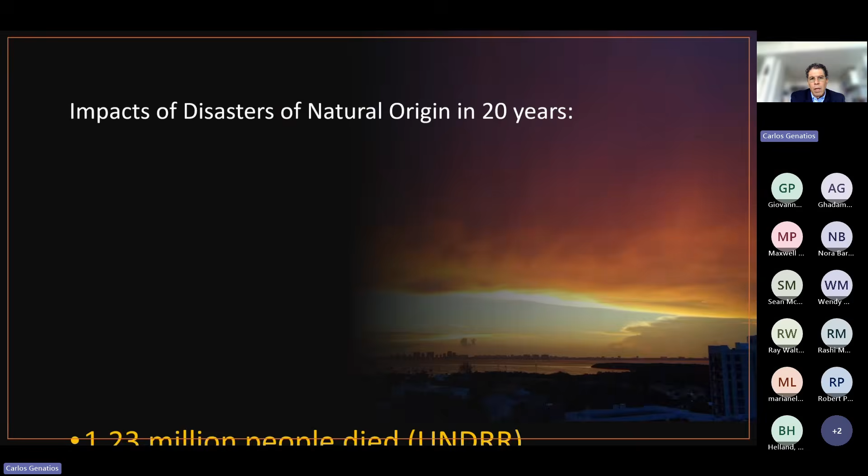My name is Carlos Genatios. I'm a professor at the Universidad Central de Venezuela and also at Miami-Dade College, Director of Engineering and Technology.

The impacts of disasters of natural origin in 20 years have shown that 1.2 million people have died, and most of those events are produced by earthquakes. Here is a slide produced by the Université Catholique de Louvain, Brussels that says that in 122 years, 8.5 billion people have been affected by disasters.

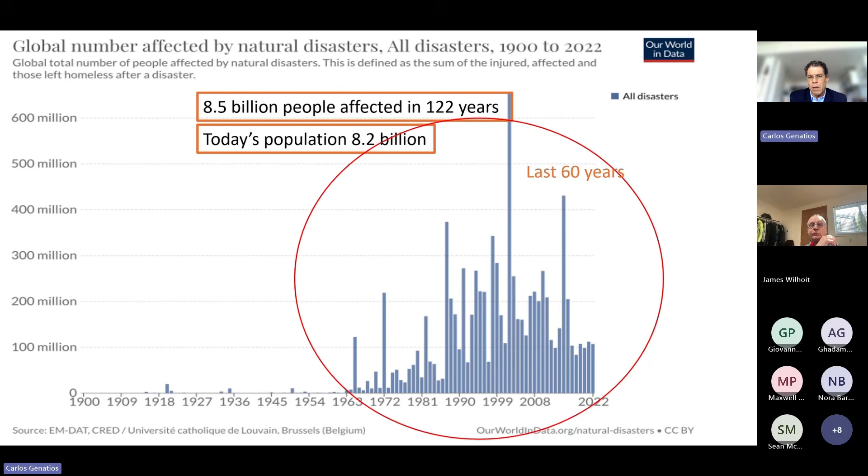And the population is 8.2 billion. But the worst part is that most of those people have been affected in the last 60 years, and this is the kind of thing that happens, you know. Those are the kind of photos that you see often.

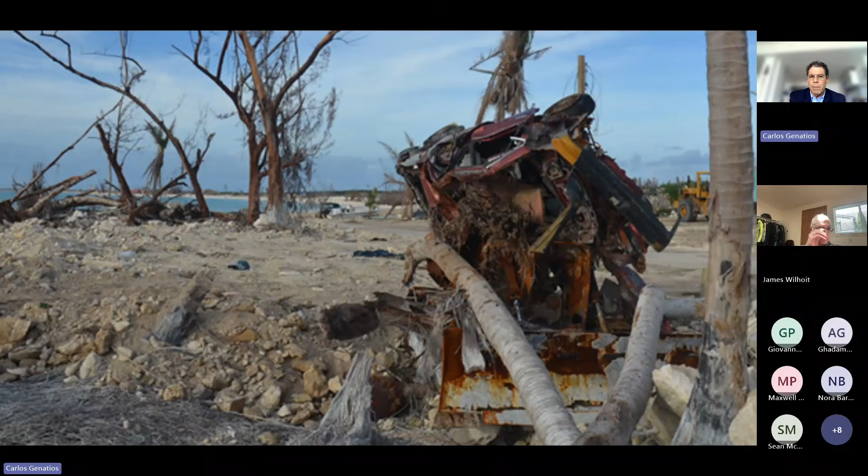This is New Orleans. And when I see this, I am always impressed by the fact that how can a hurricane turn steel into butter?

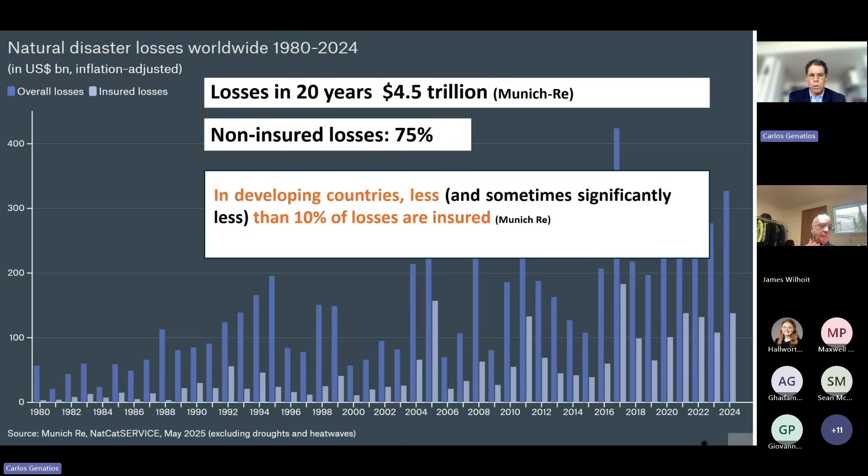The losses in 20 years were $4.5 trillion, and the non-insured losses were 75%. These are very impacting figures, but when you go to the developing countries, it's even worse, because less than 10% of the losses are insured. This is a very difficult situation.

Who are we leaving behind? What's the reality? Who are the people who are not insured? How do they survive? These are the uninsured - the people who really suffer the most, and the ones who lose everything when they don't lose their lives. I will be sharing with you 3 case studies.

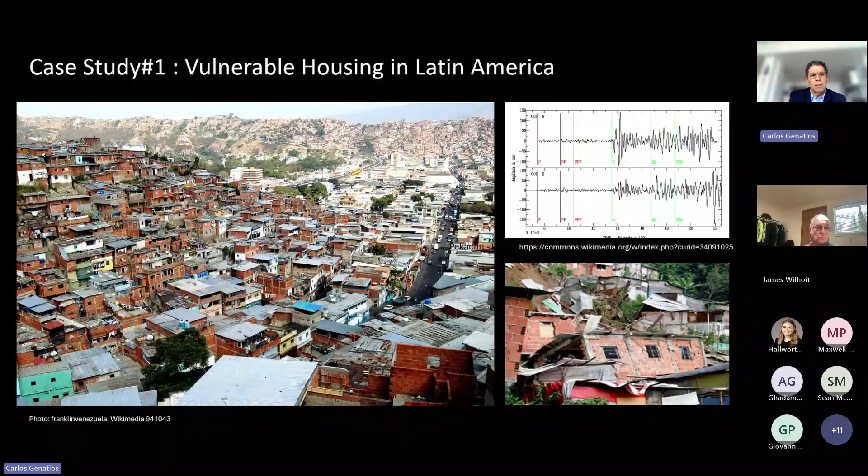The first one is going to be vulnerable housing in Latin America. The second is an analysis of a case of extreme rainfall and the disaster that was produced by this extreme rainfall event. And the third case study is the analysis of hurricane and flooding risks in South Florida, with certain models we have been developing and some strategies to better understand what happens there.

I will be following a methodology - an approach in 3 phases. First, to try to really understand and well define the problem, as well as we can. Then use engineering tools, research and design to find solutions. And then, how to turn those solutions into policies, into action that could deliver for the people, really.

I also want to say that the things I'm going to present, I've been doing with large teams of colleagues and friends, most of them for years.

First case study: vulnerable housing in Latin America. Phase 1 is what the problem is - we have to understand the problem.

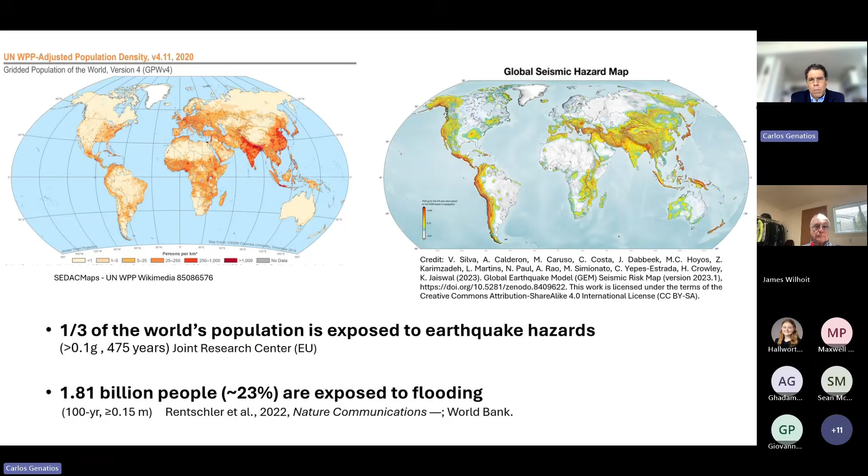First of all, 1/3 of the world's population is exposed to strong earthquake hazard, and 1/4 exposed to flooding. On the other hand, according to the United Nations, 1/3 of the population live in inadequate housing - they lack adequate housing.

But this 1/3 figure is not true - it's worse than that. Just to give you an example, look at this. This is the way some people construct their housing in Asia - India, Bangladesh - this kind of thing occurs often.

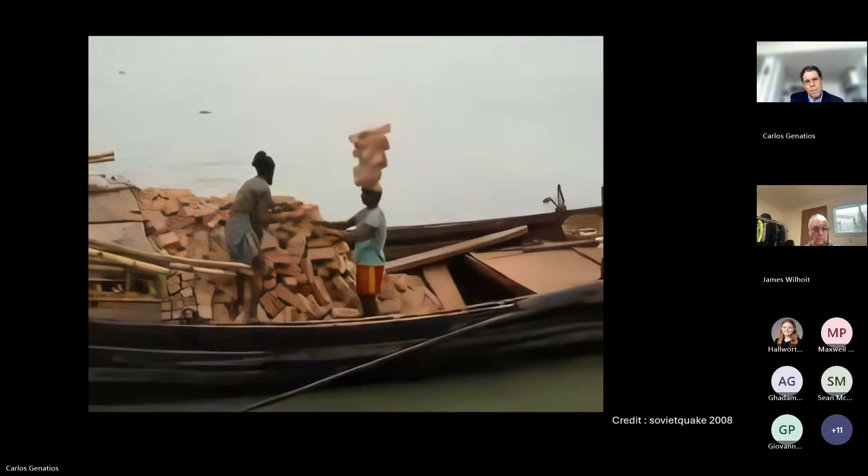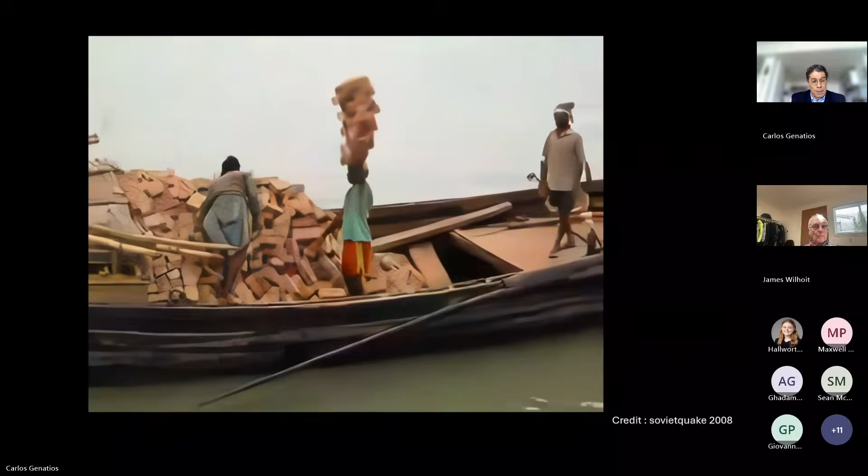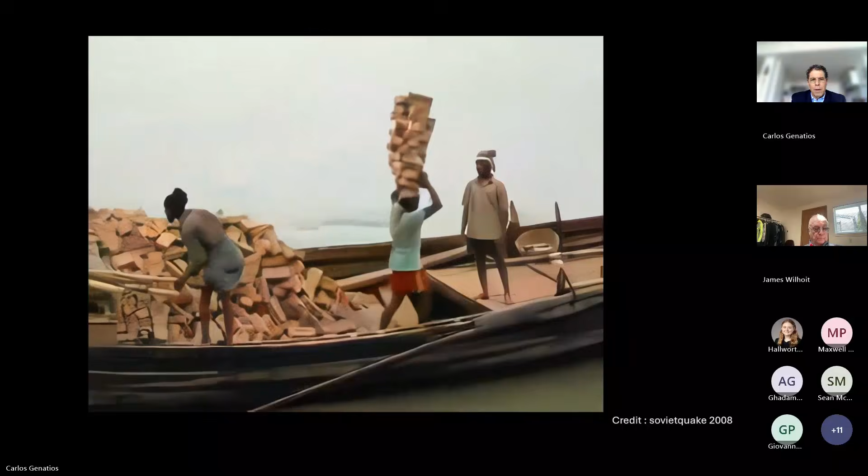OSHA would be concerned. You will be able to even see the safety boots that they use. This is to give you a dimension of the problem itself.

60% of the population in Latin America lives in informal settlements. People self-build their homes without any technical support. They consider that they have the required knowledge for that, but it's not true. And every year, 2 million new inadequate homes are built.

This requires more than 8% of the GDP of Latin America to close this gap, and it's impossible - there are no resources for that. So the consequence is people continue building, auto-building their homes with their lack of knowledge. And these are the consequences - this is the kind of urban development that we end up having in most of Latin America.

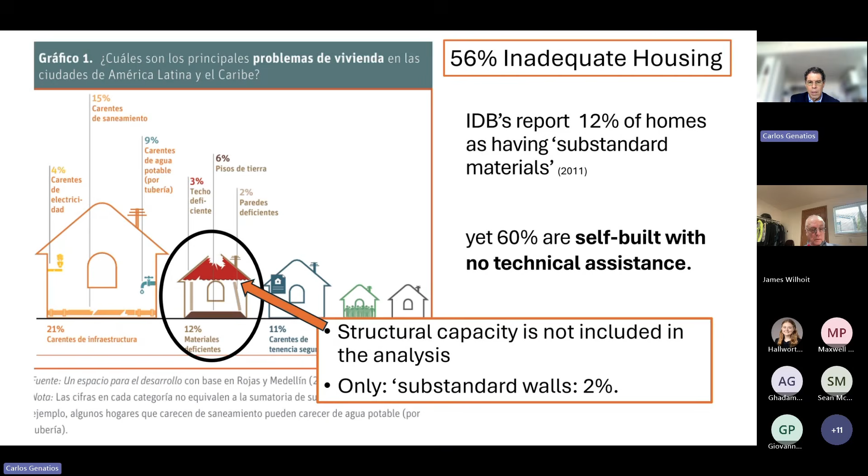And even worse, they consider that only 2% have substandard walls - this is the way they build. Only 2%?

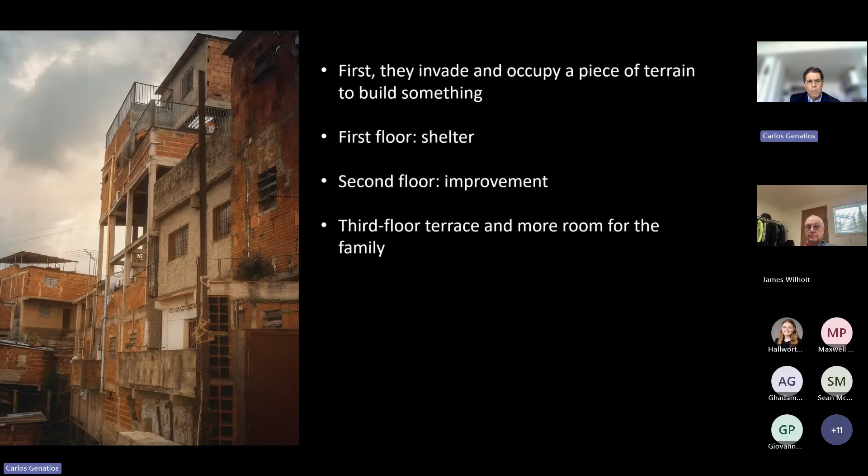They buy bricks and sometimes find some rebars and a little concrete and begin building. So the first floor is a shelter. The second floor is the improvement of this shelter because they put all their money, all their resources into the home. A third one will be a terrace and more room for the family. And they continue growing. The fourth and fifth floors they build for renting, and they make some little money out of that.

And then they continue, sometimes building a sixth and a seventh floor, and they rent all those rooms and move out, going on to the next. That way of building, without any technical support, is very fragile. And these are the consequences.

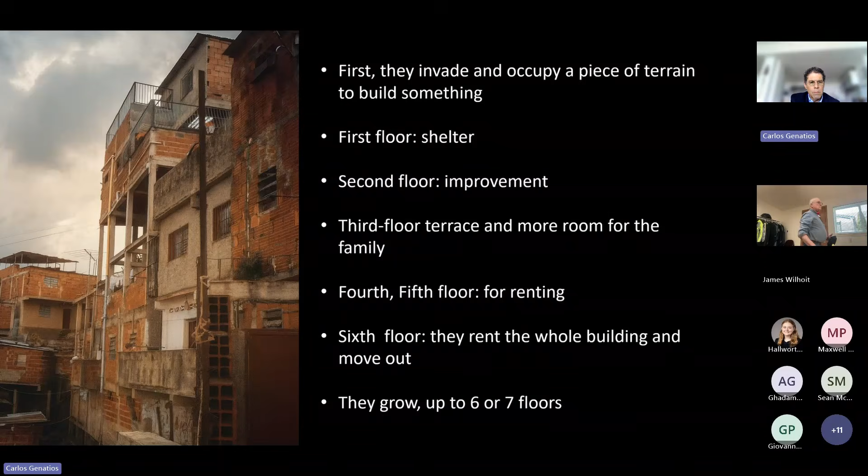These are the kind of buildings we often see. First of all, it's composed of unreinforced and unconfined masonry. They have no steel in the masonry, and it's unconfined.

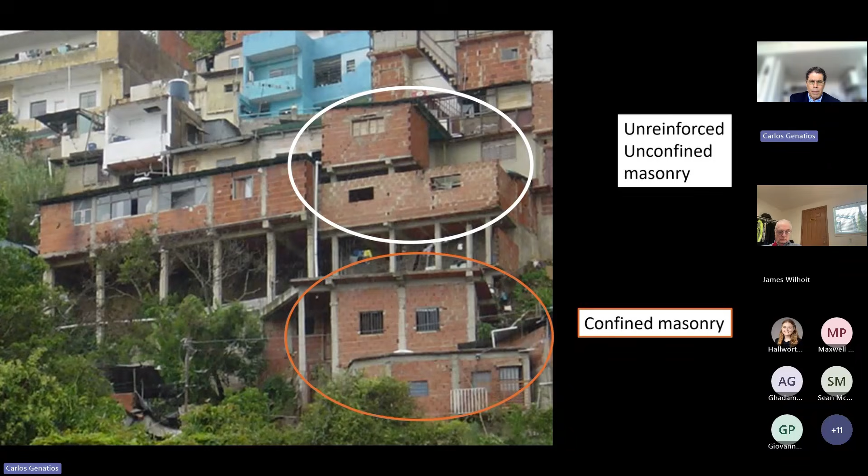They also construct with confined masonry. But when they keep on constructing, at the end they even paint what they have done, and with that painting, they feel like everything is set, it's perfect now. I had a professor who used to call this 'seismic resistant painting,' because people feel protected.

But these are the consequences. This is what really happens at the end, when an earthquake strikes, or when flooding happens, heavy rains, landslides — that's what happens.

Okay, that's a problem. So what can we do as engineers? First of all, recognize unreinforced masonry walls, confined masonry walls, and unconfined masonry walls. That's the kind of construction we usually find.

So what we did: we went to the slums, checked the materials they use, talked to the people, and brought the constructors to the lab. When we bring them to the lab, we reproduce the conditions there. We buy the same materials they use, to study and get the best out of those materials and their techniques.

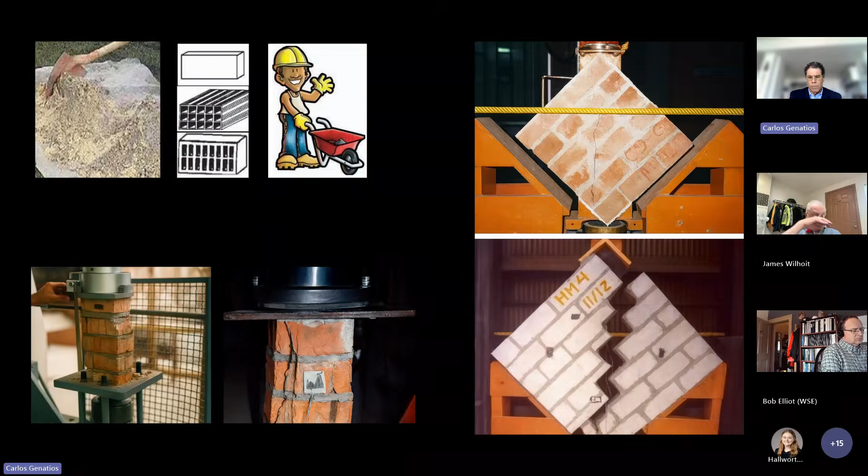So we reproduce the walls and test them, and test them, and test them, to find the characterization of those materials and walls, trying to understand the best resistance they could have and the best conditions we could reproduce with them. This was for the unconfined masonry, and this for the confined masonries.

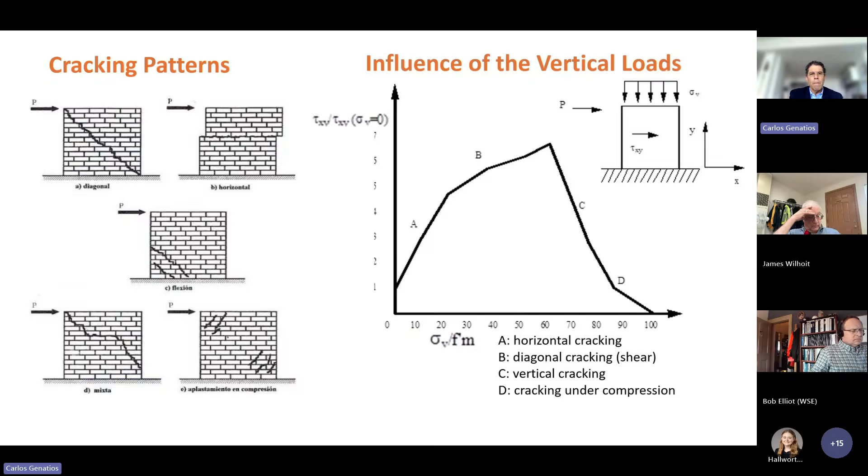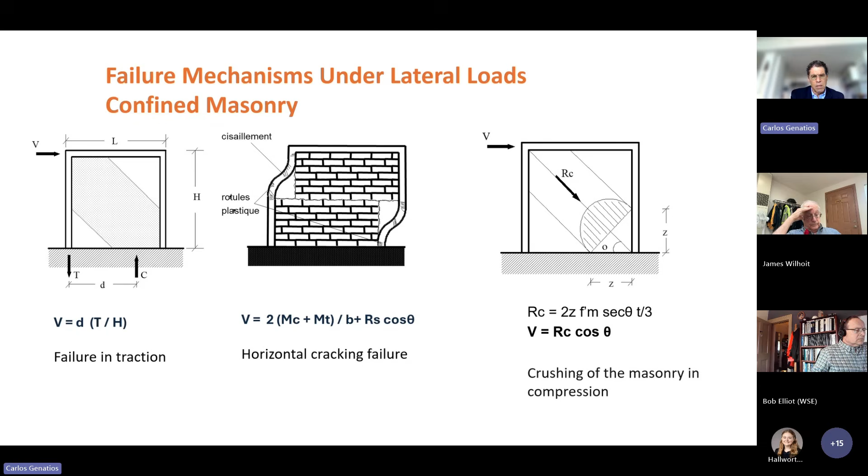Studying masonry is very complex because it is very heterogeneous in material, and reproducing it, and also creating finite element models for this, is tough. We've been doing that for years.

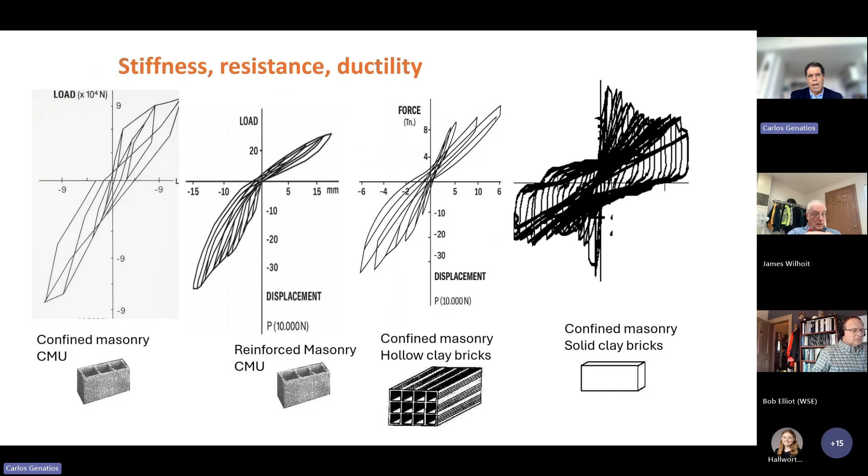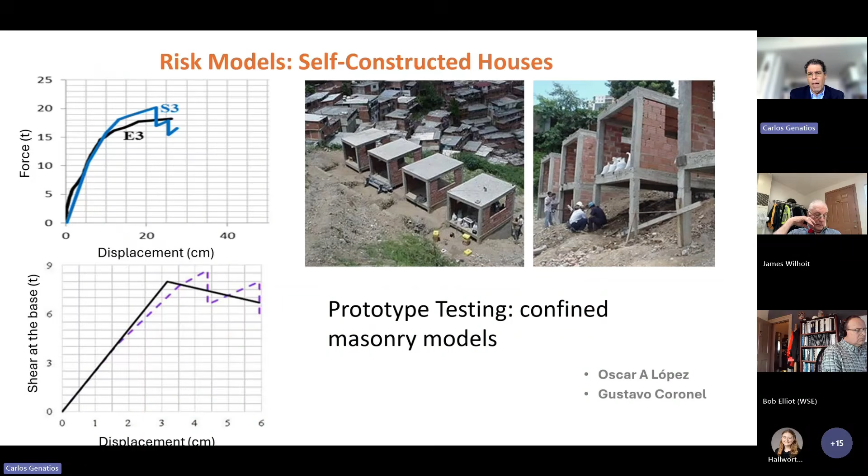Some of the main characteristics we obtain from the structural part are the stiffness, the resistance, and the ductility for several types of walls and materials. We also built prototypes in the field with confined masonry models to try to really understand the behavior, not only the walls in the lab, but also in the field.

With that, we could build what we call the fragility curves. The fragility curves allow us, when you apply a load on the side of the building, to find when you have no damage, slight damage, moderate damage, and extensive damage up until collapse, associating the load to the different kinds of damage obtained.

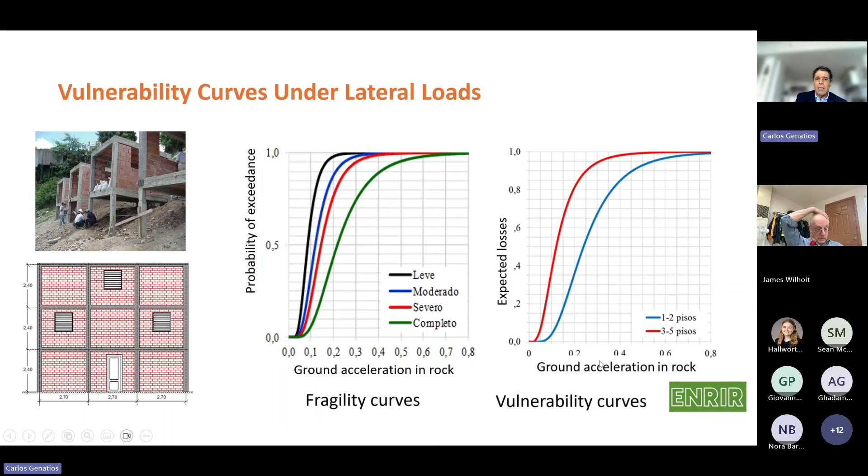With that you compose them all into what we call the vulnerability curves. With a vulnerability curve, you can obtain, for a ground motion of 0.4 G, an 80% of damage or expected losses for this kind of home. So you can associate the acceleration, in this case, but that could also be flooding or wind, to the losses you would expect in one of those homes.

Here are some of the curves for wind and also for flooding. These are the ones produced by FEMA. They're wonderful curves — a lot of study behind all this, so we use them frequently.

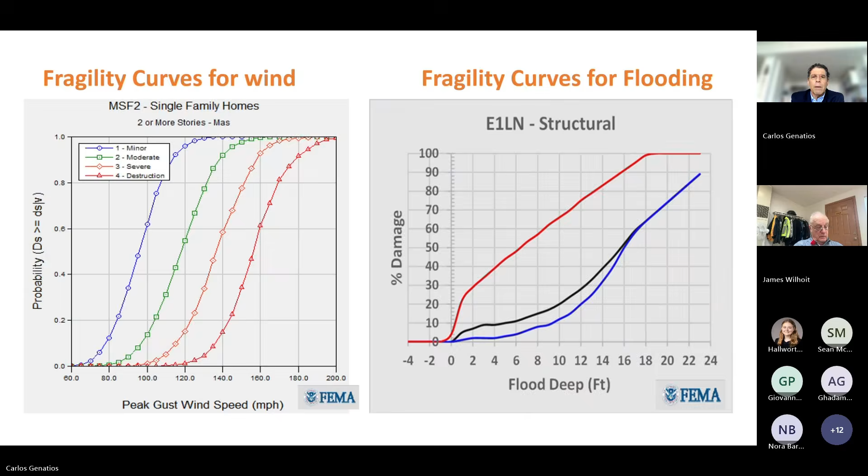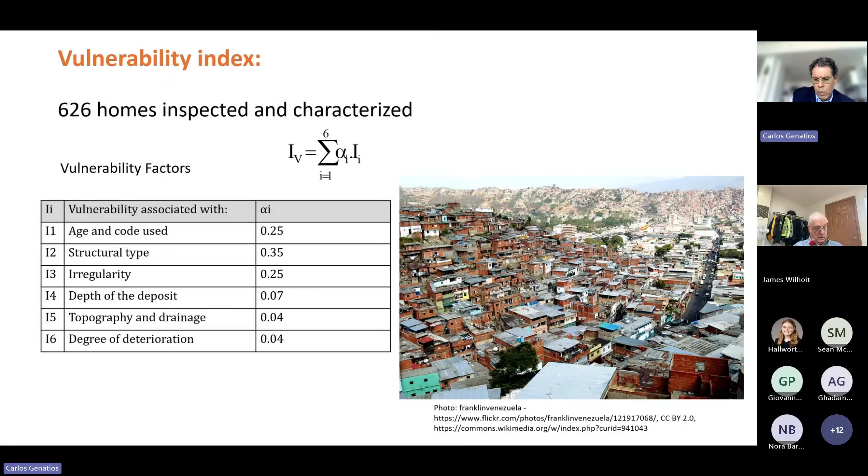We also work developing vulnerability indexes that are based on the observation of the characteristics of the homes and understanding the way they produce failure. With this, we can characterize certain areas and try to understand the damages and results that can be produced by different events. For instance, we characterized the structural condition of each one of these different homes. In a certain region where we studied 623 homes, we found that 8% have high vulnerability and 92% very high vulnerability.

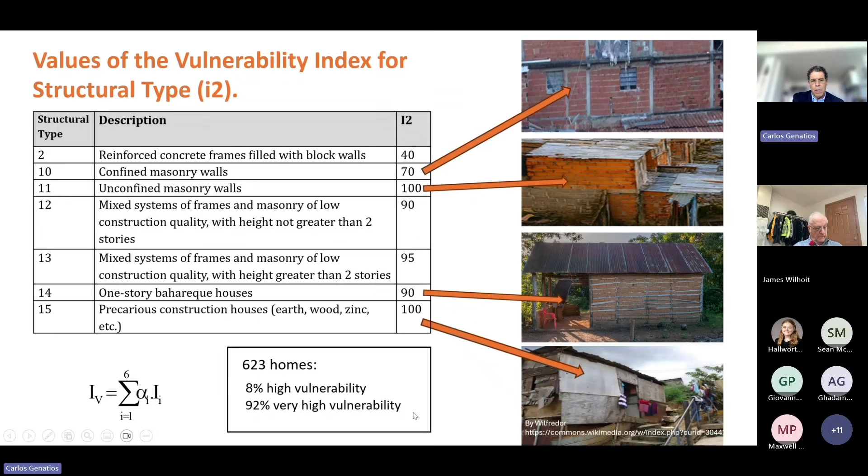Once we have done all those studies for years, let's go to action. What's the action in this case? Once we understand all the things we have learned, we have to deliver. We deliver by creating tools for municipalities and communities. That's the main goal of what we've been doing. And what are those tools?

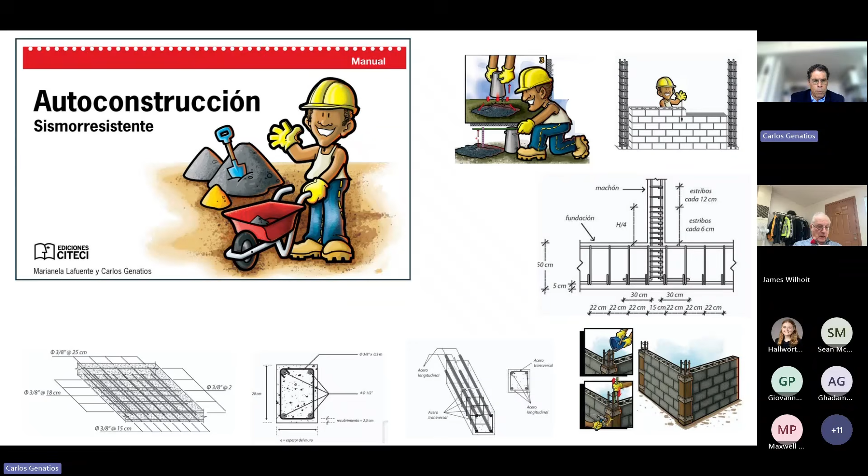First of all, some guidelines for people when they build, popular guidelines we call them. For people when they build, you have to do this and that. We do them with very simple designs, and we put people to teach them, to discuss with them the way they have to build, so they can produce the best out of their materials, the best out of their techniques, as good as possible. Never too good, never able to withstand 7 floors or 6 floors, never more than 2 floors, but that in the best scenarios. But that's the first thing we did. We created manuals and guidelines, easy ones with videos, for people to build correctly in the slums.

Second, we created guidelines for the municipalities in which they can assess the construction systems, the different construction systems in the municipalities, so they can select the most adequate ones depending on the local conditions. We also created codes, and this is quite significant because we're going to be talking about this a little bit later on.

We develop risk models for planning and emergencies that we provide to the municipalities, and they're ready to be understood and worked with. So the idea is that people can really know what the expected losses in a given event could be and the areas that are going to be damaged mostly.

There was also another thing that we created, something we call the Barrio Lab, or Slum Lab. These are large projects that take a specific region, and we develop the urban planning for them to have an idea of how their lives could improve, to give them motivation to work together, creating a better quality of life. And while we do that, we also plan, and if we can, we construct the engineering things that we need, structures that we need to control the damages.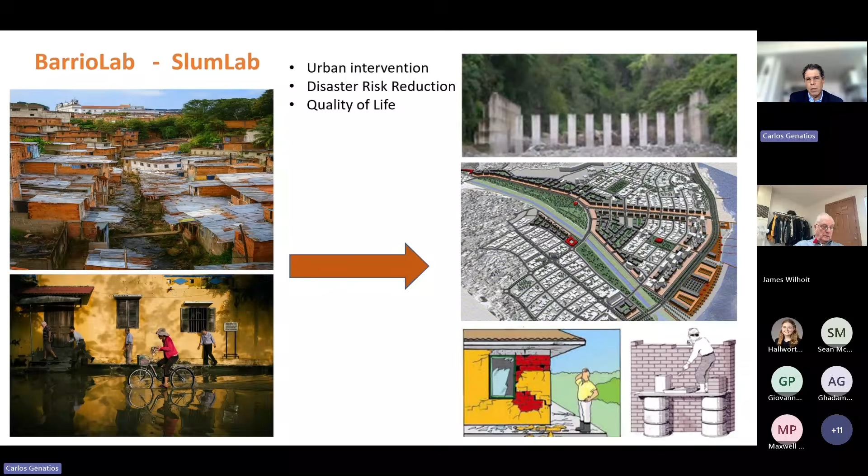As a consequence of this, I was appointed Deputy Minister of Urban Technology, and at a given moment, of urban development in charge of housing. We developed several programs for housing, for low-cost housing, and for people in very vulnerable areas. But in particular, I want to outline two of those programs.

The first one is the modular homes for progressive expansion, in which when people begin building, we come to them and tell them, listen, we can help you. We will work with you, but you need to follow these technical guidelines. We can provide you with some materials, some small loans that you pay back, and in return we give you more support and more materials. But you have to follow these guidelines, so you cannot construct anyhow. You have to follow these guidelines. So technical support is the main issue here.

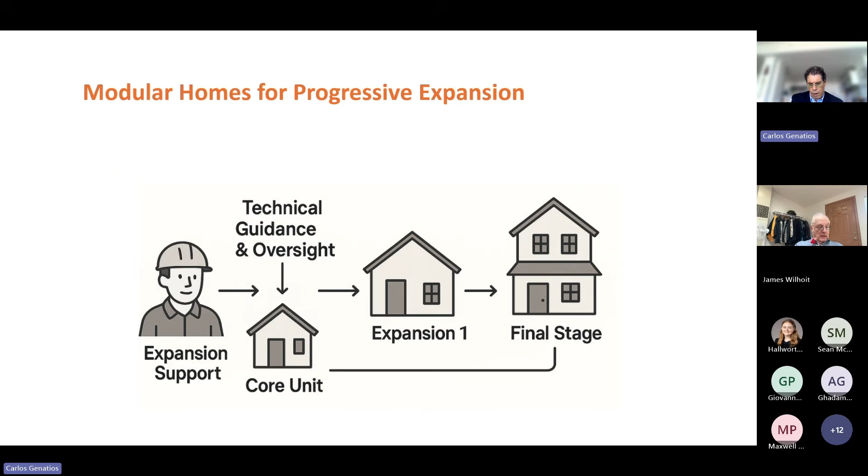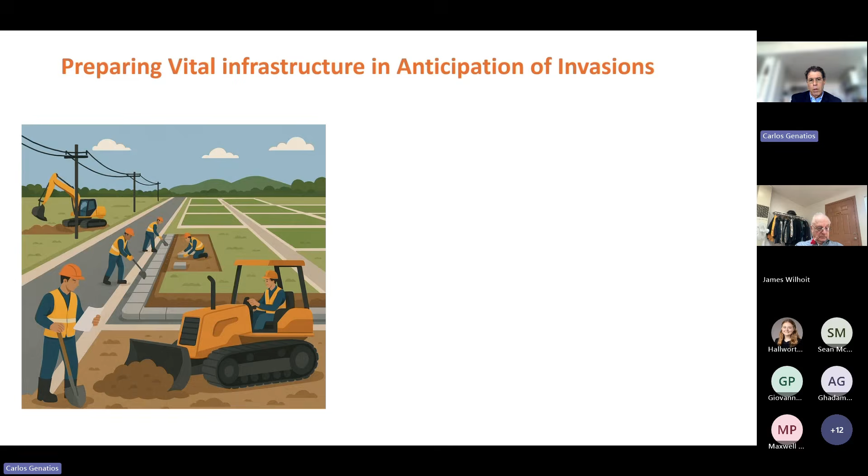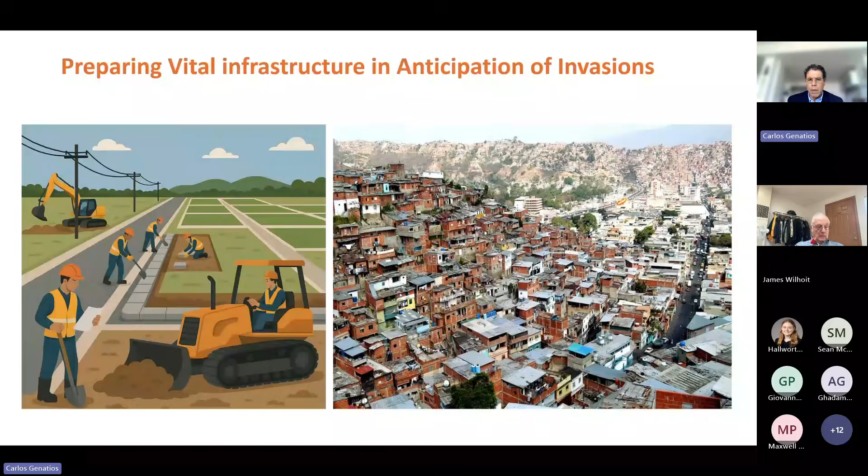And the other program is for when people invade land. Before they invade, we need to prepare some lands and put in the required infrastructure before they build, because once they build, it is impossible to put the infrastructure in. It is impossible to put water supply, sewage, and even roads. If you have an earthquake and somebody survives but the home collapses, how can you bring in cranes to liberate the people and save them? You cannot do that.

As a consequence, in a couple of years we were able to attend to 92,000 homes and upgrade very interesting urban zones. That was something we did at the beginning.

While I was doing that, I was then appointed Minister of Science and Technology. But when I was appointed Minister of Science and Technology, something else happened. In December 1999, we had an extreme rainfall event.

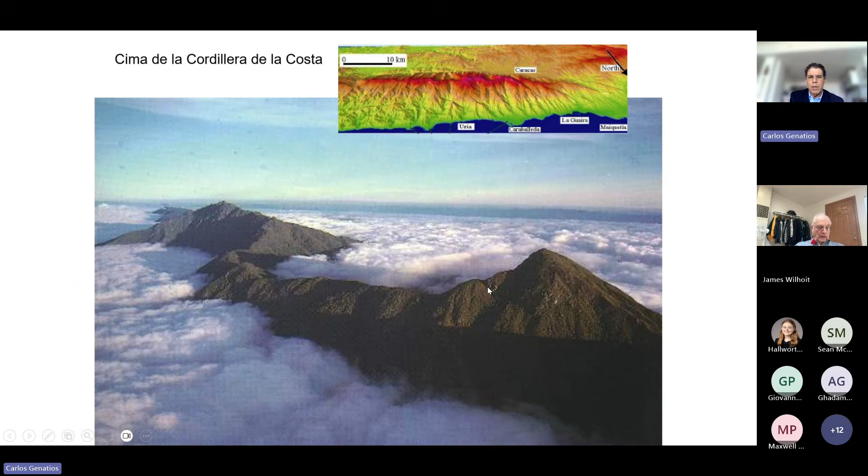The rain fell on the mountains up here, and it washed away little towns at the bottom. These are 9,000 foot mountains with strong slopes, 30% slopes, and you can see the pathway of the debris coming down toward the sea. The impact was huge. It produced about 20 million cubic meters of sediment, which is about 6,000 Olympic pools, depending on how you calculate it could be 8,000.

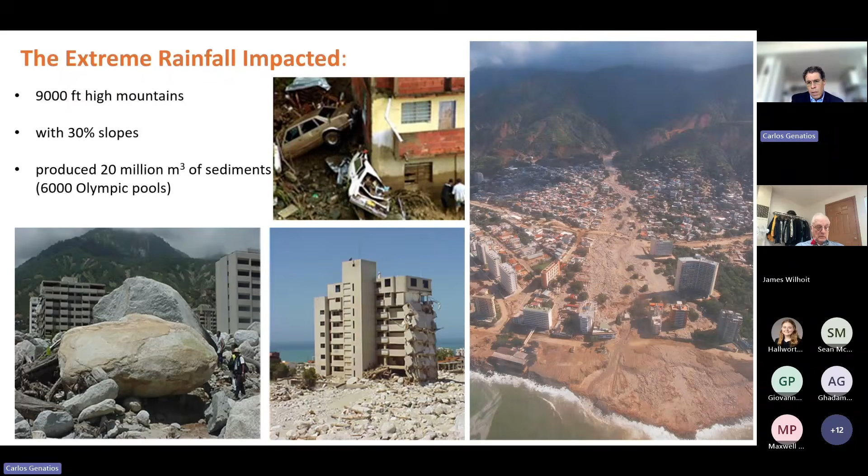This is the second case study, a disaster produced by extreme rainfalls. When we studied the problem, several people gave us assessments. At the end, we accepted it was a 500-year return period event, but people from the United Nations estimated it as a 1,000-year return period event. A professor from the Technological Institute of Lausanne came to me, very surprised, and said he was concerned because this was a very weird event. Given the size, the rocks, and the conditions in how they moved, he considered it a 5,000-year return period event. So it was a very unexpected phenomenon.

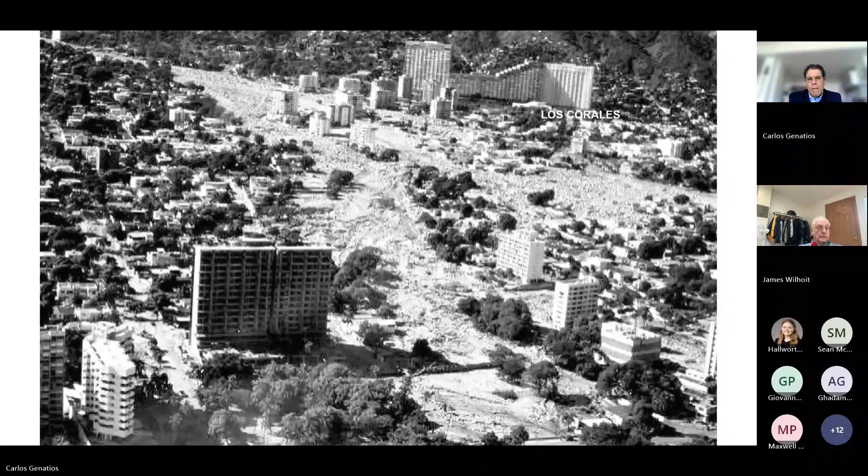You can see some of the basins that were destroyed, and this is all debris produced by the event. Several areas were destroyed. Here you can see the kind of funnel produced when rain falls up here, collecting all the water and bringing it down with impressive force, washing out everything it finds on the way.

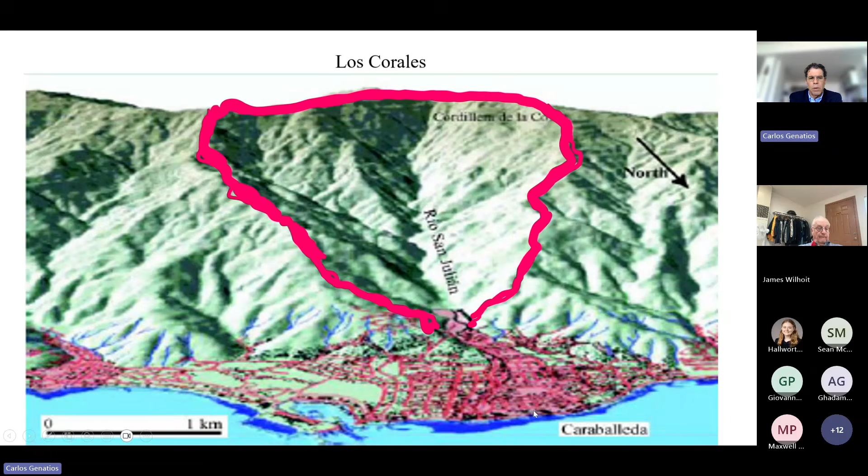Mainly 10 basins were impacted very heavily, though at the end there were more than 20. The water fell on the mountains and washed away the populations below. The problem is the places where people build, because these platforms that look wonderful for building close to the beach are very dangerous — they were created by nature through phenomena similar to what we suffered in this event.

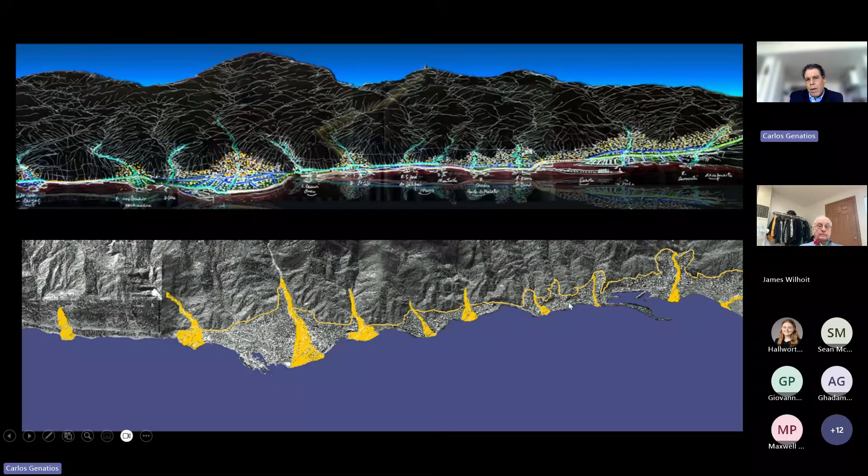Here in yellow, you can see the scars produced by the debris as it was flowing. This is one of the basins that was destroyed, and this was the previous coastline. You can see all the debris that was produced and the new platform on which people could build, and people are building again after that.

Buildings were destroyed, and you can see the condition of the mountains after that. The port was completely destroyed, and several towns were destroyed too.

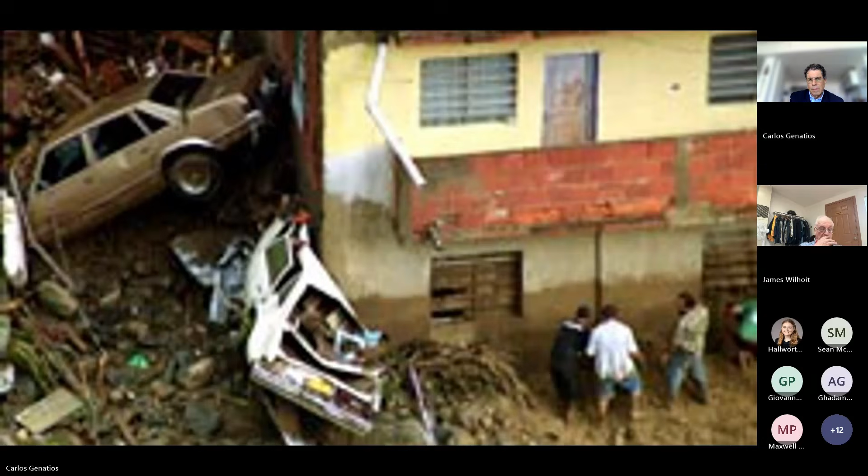This is one of the towns that was really washed away. You see the water coming down, and when it did, it took several homes away. This was the result: unconfined, unreinforced housing that was destroyed by this event. People were suffering, trying to rescue whatever they could, and losing everything.

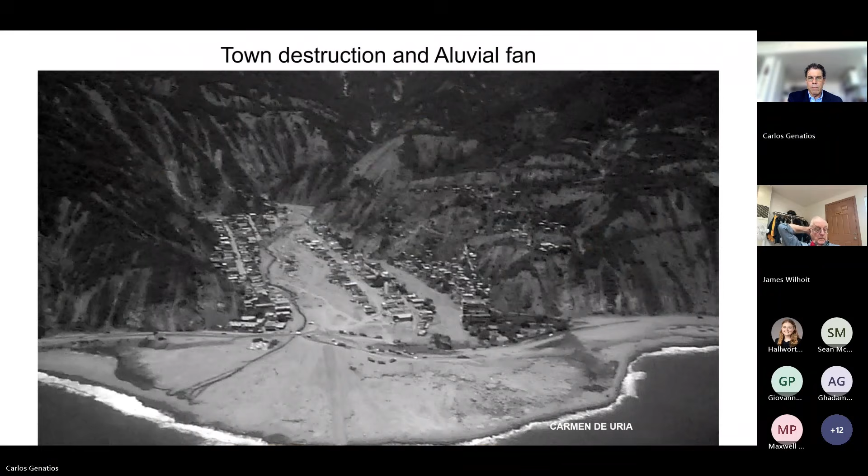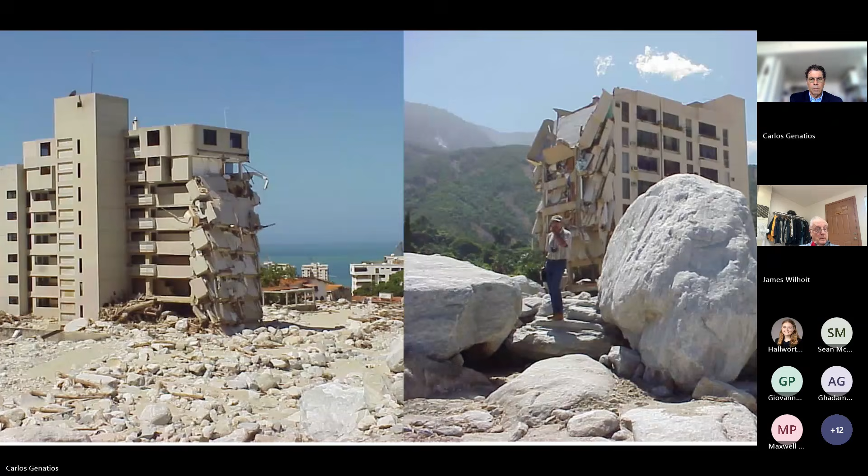You see the total destruction and the alluvial fan, the way it impacted here, and the size of the rocks that came down, destroying some of the buildings too.

Consequences: 40,000 people affected, 100,000 evacuated, 5,000 fatalities — though this figure we are never sure of. At the beginning, the Red Cross said it might be about 50,000 fatalities, which thankfully it was not; at this moment I don't think we'd even have 5,000, but it was still a very tough event. At that time we had 5 billion in losses, which is about 10 billion today. 8,000 homes destroyed, water and sewage systems impacted, roads impacted, 5 hospitals almost completely destroyed, and economic activities stopped 80%.

At that moment, I was appointed the unique authority for the planning of the reconstruction. So we had to start from scratch. We didn't have any institution for that, so it was a big stress, and I had to create the institution from scratch.

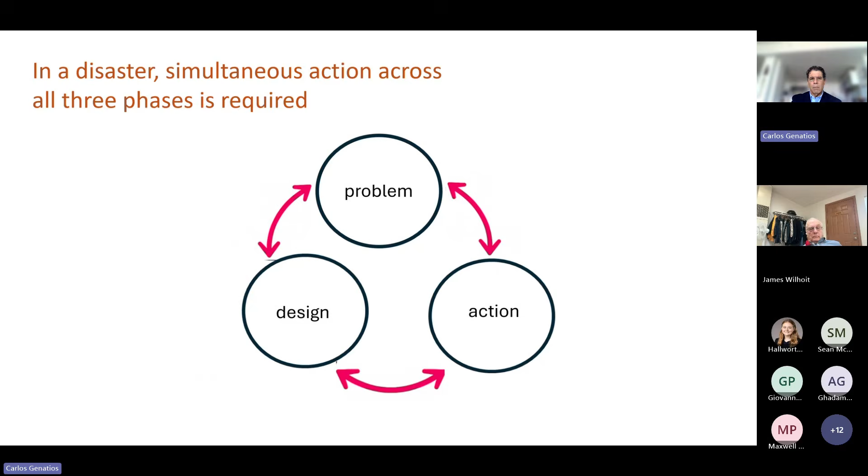When we talk about disaster, the approach I've been telling you I follow is: you have the problem, understand the problem, then do the engineering design, and then the action. But with these kinds of things, all of them go together at the same time. You have to try to understand the problem, the consequences, what caused it, and you have to take action immediately, clean, liberate people, and work on the designs.

The design for the solution had several things, but mainly two axes: one was urban planning, and the other one was the construction of hydraulic engineering structures.

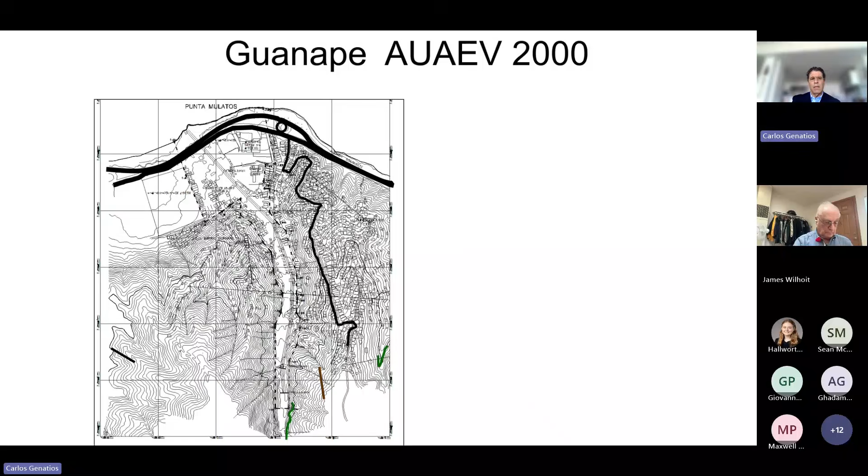For the urban planning, for each one of those basins, we created plans. They were very detailed. They selected the use of the land for each one of those cases, and they provided a lot of support for the communities, for each one of those basins.

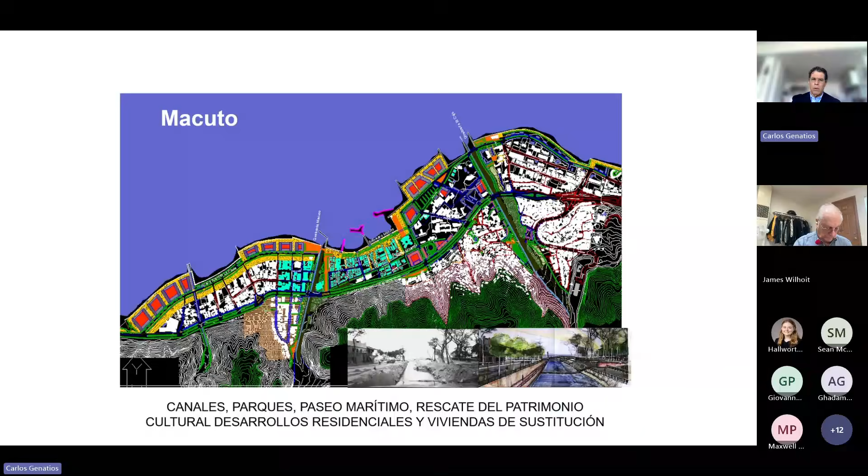I could go on and on talking about this urban planning that we did. Urban planning didn't come to reality completely, or far from that, but we did the job of planning and creating.

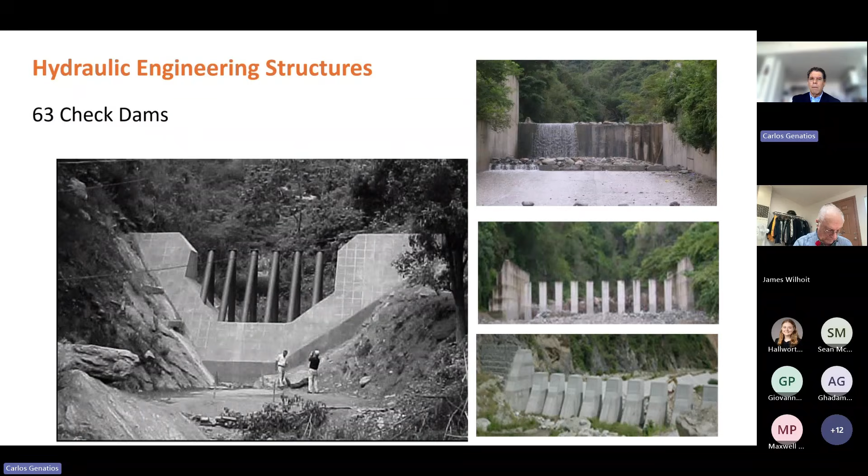Then the hydraulic engineering structures - at the end, 63 check dams were created. As you can see, they are specific for debris control mainly, and also channels, canals that needed to be constructed for the protection of the populations.

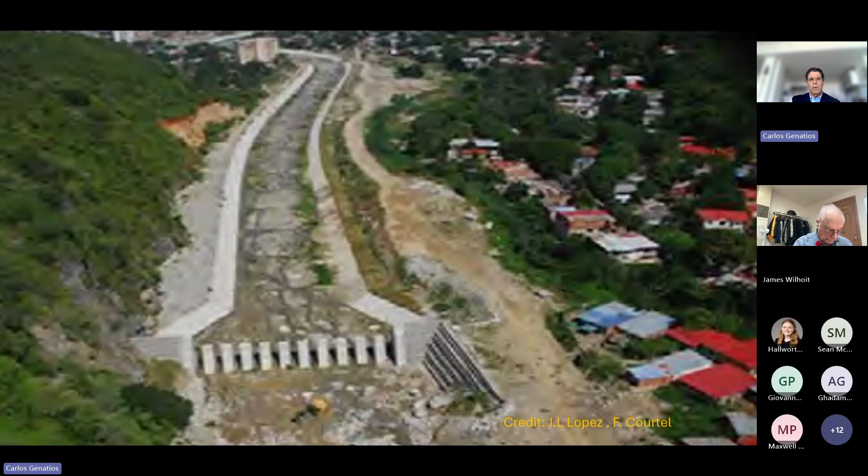That's the kind of constructions that we created. There was a lot of problems there because others that were built at the beginning didn't work, and it was a huge political problem with that. But this is an example of one of the ones that were done correctly, a canal and the structure.

Then I went back to the university to work and teach and do research, but some years after, I became a politically persecuted guy, and I came to Florida. I left Venezuela in 2018, and I became a US citizen, and I'm so grateful for being here. Once in Florida, we'll talk about case study number 3.

When I see these kinds of things, I'm always impressed. Hurricanes could be so beautiful, but at the same time so destructive, so evil.

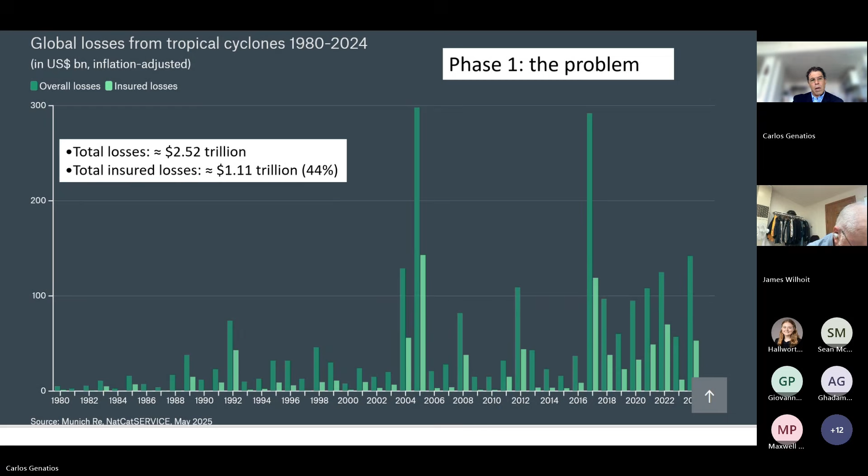Phase 1, the problem: total losses in 44 years, $2.52 trillion, and only about 44% was insured. But the costliest tropical cyclones in those 44 years impacted the US - all of them. Katrina, Harvey, Ian, Sandy, and Ida impacted the US with total losses of $625 billion and only 45% insured.

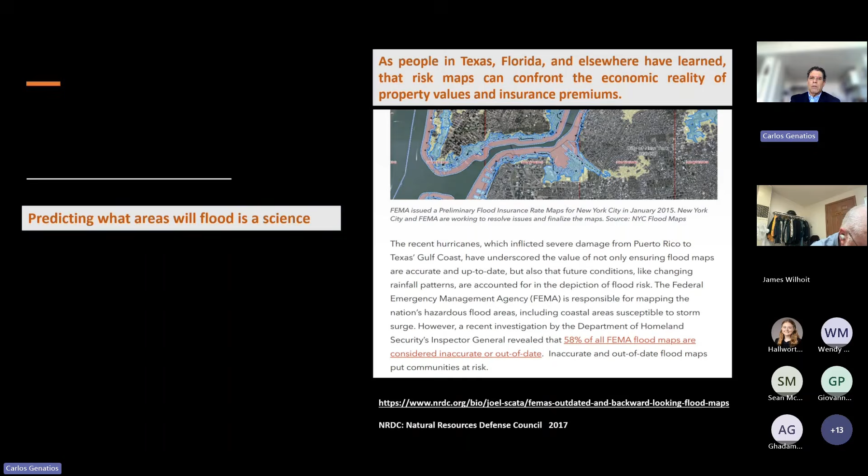Predicting what areas will flood is a science, and it's a big problem. It's pretty hard. All the maps that have been delivered sometimes don't cover all the areas that are impacted by hurricanes and flooding. We can see here that, for instance, in hurricanes Harvey, Irma, and Maria, many properties that were not marked as risky on the federal flood map did in fact flood.

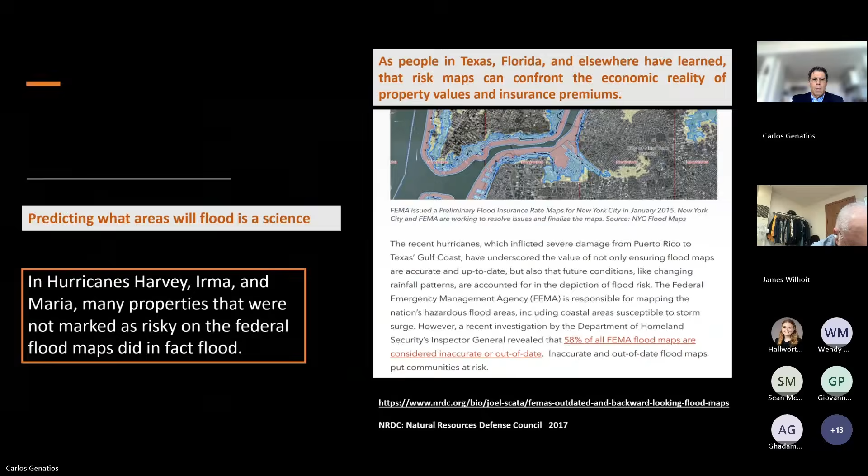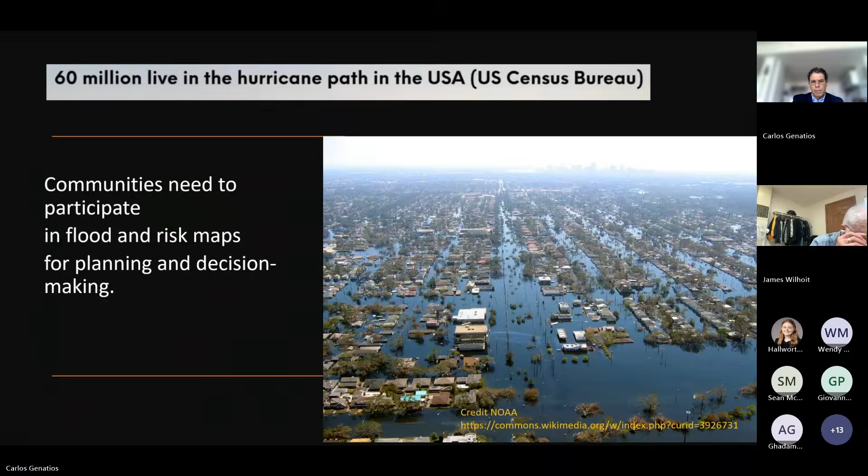60 million Americans live in the hurricane path in the US, so we need to involve the communities in understanding the risks. FEMA used to have this kind of guidelines - we have to involve people in the understanding and the decision making.

So a lot needs to be done. Many municipalities lack the financial resources and knowledge. Local capacity needs to be developed and reinforced, including education, risk analysis, and consulting capacities. And this is to be done in a very difficult environment, because normally the political leaders in municipalities are there for a short period of time. If you're appointed for 2 or 4 years, you will hardly think about a 500-year event like a hurricane. So this is hard to develop, and this is a really tough task that we have to work on.

The problem then is to improve the data and risk models for consulting and supporting communities. And in our case, to create an academic program from high school to graduate studies and develop a network on these areas, to teach people, but especially to teach young students, for them to be able to let their families know where the problem is.

So phase 2, engineering, research, and design. What is it, what have we been doing here? I will show you some of the examples of the areas that we have studied, and we have studied a lot of them in the Miami region, Miami-Dade.

Here I will show you about 3 census tracts in Miami Beach. The methodology we followed was to assess the risk using public data, and also developing our own exposure models with very detailed data to compare them, to see if the assessments we obtain with public data are correct. So first, we take this example, these 3 census tracts in Miami Beach.

By the way, just north of this census tract were located the Champlain Towers, which fell about 5 years ago. First, we develop a precise exposure model with drones. We use a very heavy density of points to reproduce reality as well as we can. We create the orthomosaics, the digital surface model, the digital terrain models, and we use LiDAR to create the digital surface model of the vegetation to assess flooding correctly.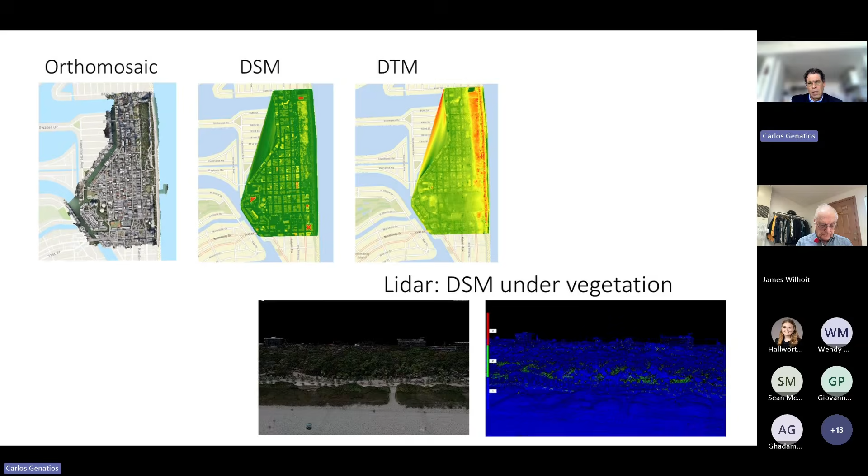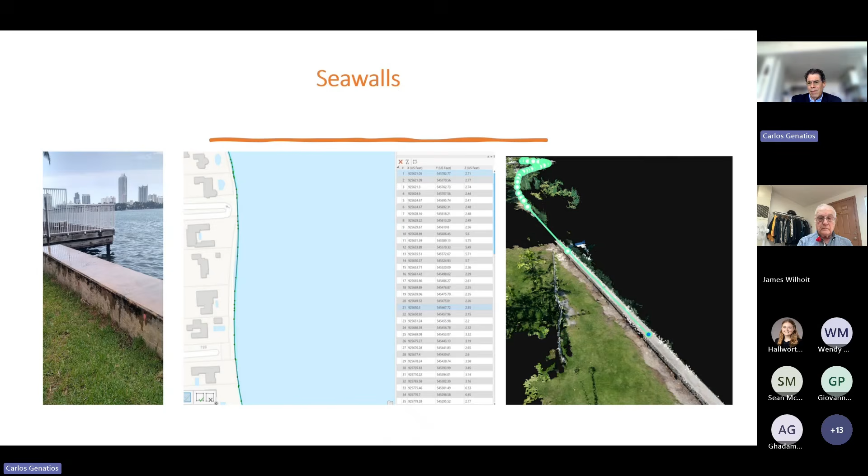We include the seawalls, and while doing this assessment, we can also check areas of the seawalls that are cracked, and provide that information. Once we do those models, we find several discrepancies, and here you can see some of them.

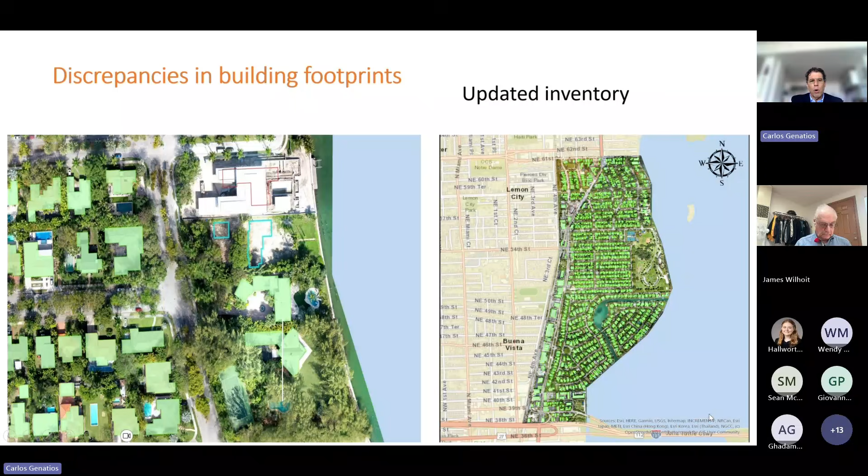These are the discrepancies we find in building footprints. In green, you see the ones obtained with public data. But when we go with the drones, we find there are differences. So we have to develop an updated, more realistic inventory using our drone flights.

We create the improved building inventory for each area of study. For these 3 census tracts, we find there is a 33% increment in the value of the building inventory when we use the level 2 models, the ones we obtain with the data we generate.

Then we run the hurricanes. We run 25, 50, 100, 150, and 500 year return period hurricanes, because that way we can generate the annualized results. In this case, I'm showing the maximum gust speed: for a 50-year event, 92 miles per hour, and for 500, 169.

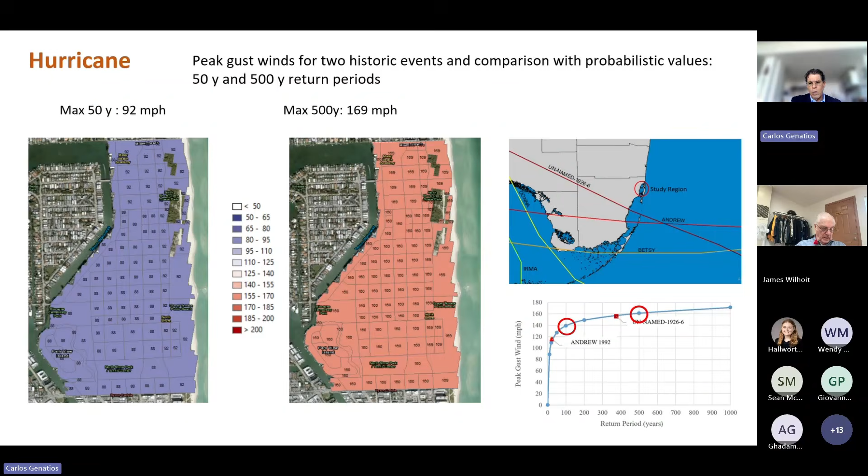This compares the speeds, the peak gust wind, for Hurricane Andrew, one of the storms that impacted Florida the most—shown here in red. And the other one, the unnamed storm, also in red, from 1926—at that time hurricanes were not yet named. So I'm showing these red circles as the ones we used to assess the impacts.

The results are the following: for the 500-year return period losses, the model we developed produces a 60% increment in expected losses, and for the annualized results, it's a 57% increment. So it's about a 60% increment when we refine the model compared to results obtained using public data.

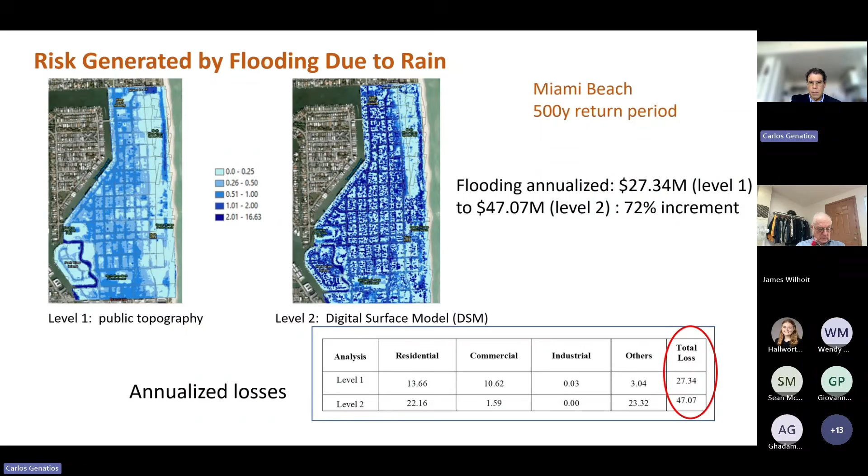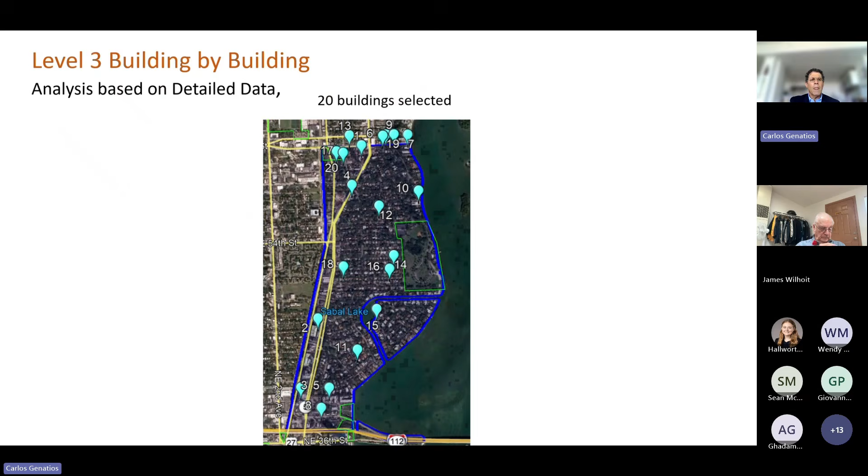Then we go building by building. We develop what's called level 3—that's the way FEMA defines it, and we're using it. They use level 3, building by building, and we analyze. Here we were analyzing 20 buildings in this area.

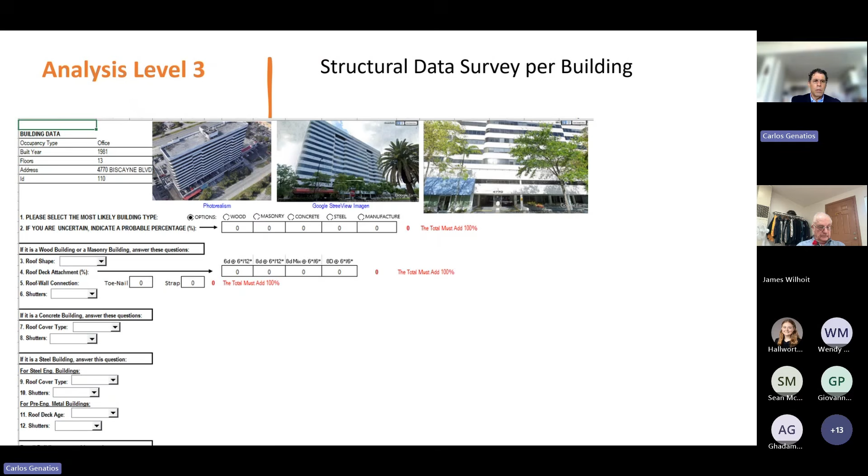We select the buildings and gather all the data for those buildings. We have to develop a survey. Some information we get with the drones, for other information we have to visit the building, and some other information we don't have completely. But once we have all that, we develop this data survey for those 20 buildings and generate the results.

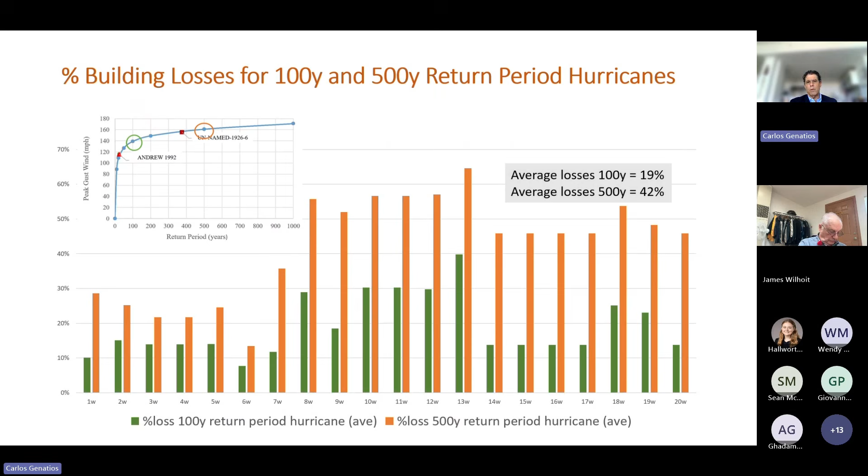For the flood, we obtained in that area that the debris generated by the 100-year flood was 3.2 times the level that you could obtain with the public data.

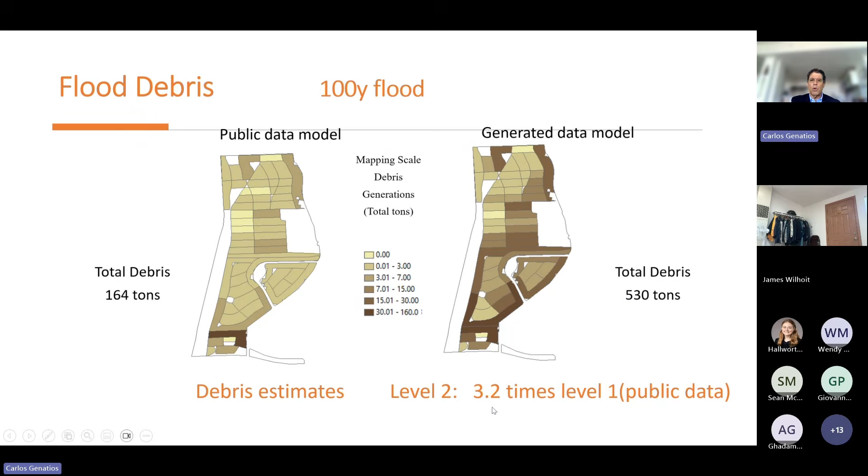We also developed some easy access models, surveys for people to try to understand the risk. We discussed that with the people. People complete a little survey, and we give them an idea of their condition and a comprehensive risk index, so they can understand the exposure, the physical vulnerability, the social vulnerability, the resilience, and the comprehensive risk index. This is private. They are the only ones who get the results.

I want to show you something also, which is the king tide in Miami that we have been assessing for years. We've been flying the drones already 5 years. This is going to be the 6th, in which we follow the impacts of the king tide in the most vulnerable areas of Miami.

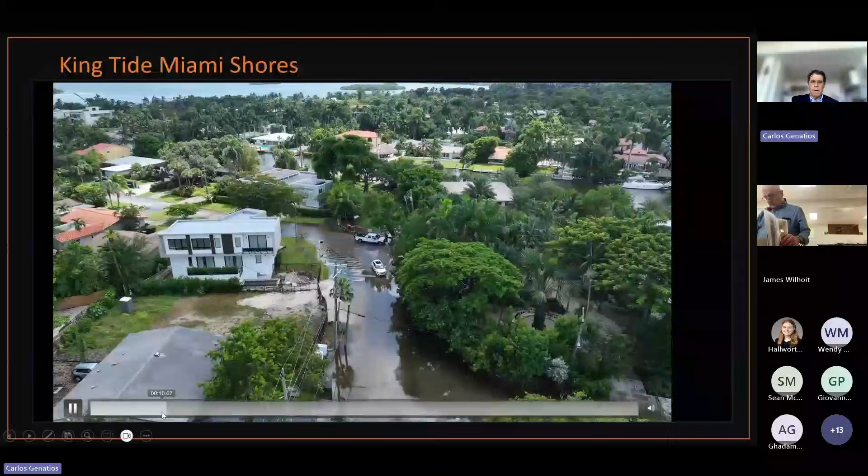Moving forward a little. These are some of the most vulnerable areas of Miami.

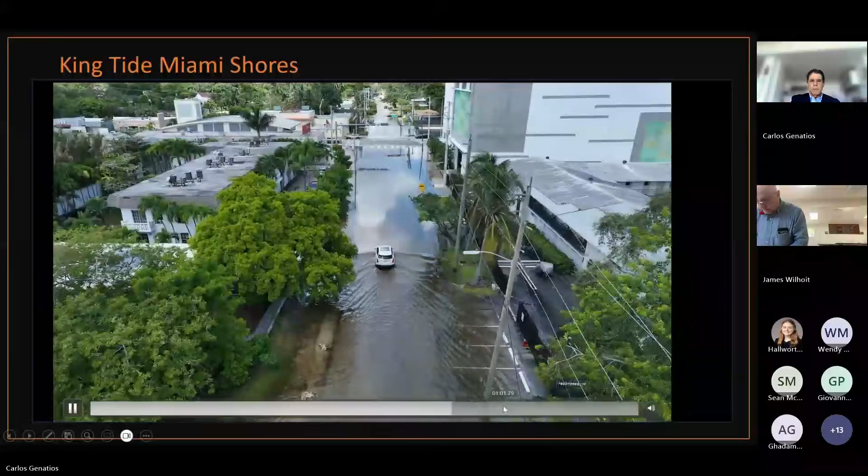Sometimes it's really complicated. I want to show that you feel the differences. Sometimes you see some areas of people who do not have the resources to build their seawalls to protect themselves, and they are well exposed. In front of that, sometimes you have these huge and strong seawalls to protect other properties. So that makes a big difference.

To deliver, to give back to the people, what have we done? I have created a GIS program, a college credit certificate, 21 credits, to motivate students to learn GIS. While they learn GIS, they use most of this data to understand about risk.

This was created at Miami-Dade College, and we created a dual enrollment articulation with the Miami-Dade County Public Schools, so students from high school can take some of these courses. Once the students complete the college certificate, they can continue to get an Associate in Science in Information Technology and the Bachelor in Science in Information Technology at Miami-Dade College. And they can also continue to Florida International University to obtain a graduate certificate in GIS.

Another program that we have created is an Associate in Arts in Geomatics that we are just finishing now, for students to be able to transition to the University of Florida and complete a Bachelor of Science in Geomatics at the University of Florida. They can also then continue for graduate studies there.

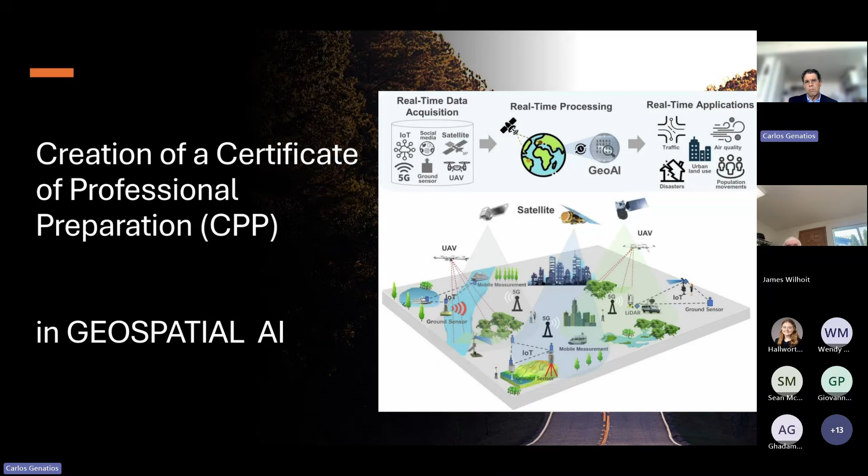We're also working on what I call the level 4 risk analysis for buildings, which includes the damage of the buildings, because all the vulnerability curves and the analysis we usually carry out do not consider the damage, especially the corrosion in the buildings. As you can see, we live by the sea, and there is a big impact of corrosion on buildings, especially when they are 40 years, 50 years, 30 years old. So we have to begin to include this in the models, modify the vulnerability curves so we can better assess the risks.

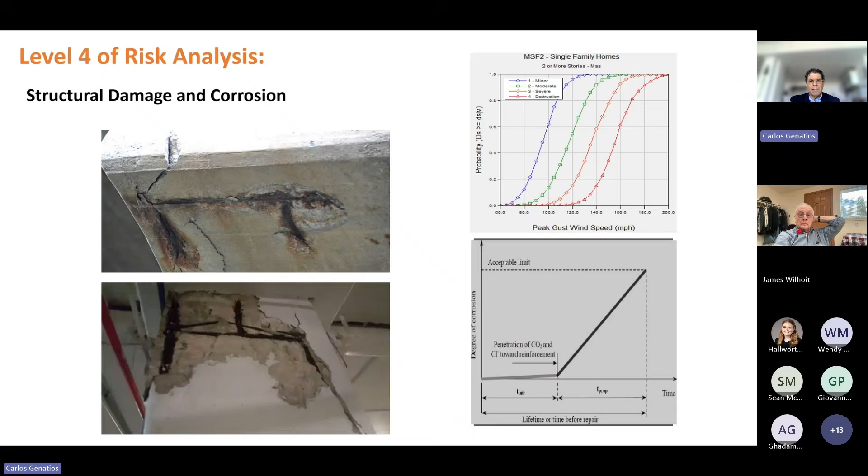In order to do this, we're using several methodologies, but one of them is to use the Applied Technology Council forms. They have the ATC 45 for windstorms and floods, and the ATC 20 for earthquakes. So we use those formats for the assessment.

Just wrapping up. Remember, they are the uninsured. They are the main reason why we do this. Disasters deepen inequality. There is this citation from the World Bank: natural disasters systematically make poor people poorer, while the better off often recover faster and may even gain economic advantage. If they're clever enough, I'm not blaming them, but I think we have to focus on the people who have really suffered the most, because poverty is already a disaster.

How many lives can we touch? How many people can we help? How many kids can we help be happy?

There's this citation of Plato's, which I cannot remember all the time. You can read it on your own: declining to engage in politics is to be ruled by someone inferior to yourself.